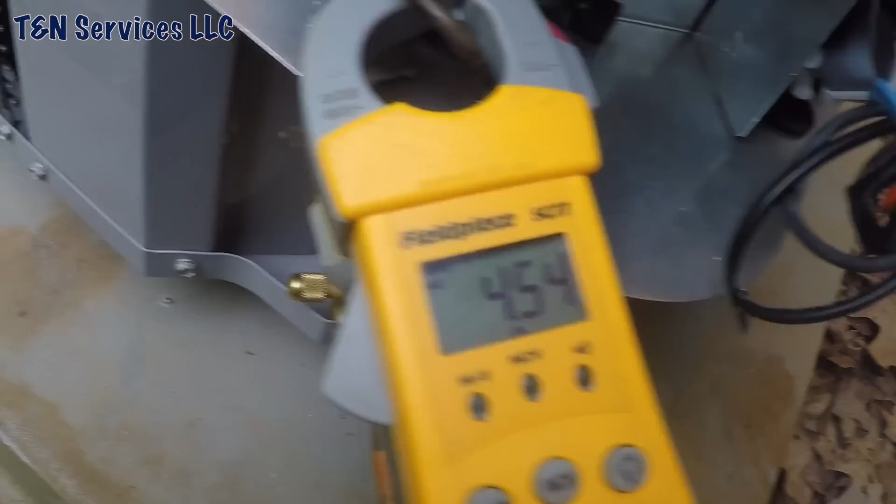On low speed. Oh, I turn my meter back on. So I just turned my other thermostat on, so let's see how long it takes to ramp up. While we're waiting for it to ramp up, let me show you the door. This dang door is pretty big too. Alright.

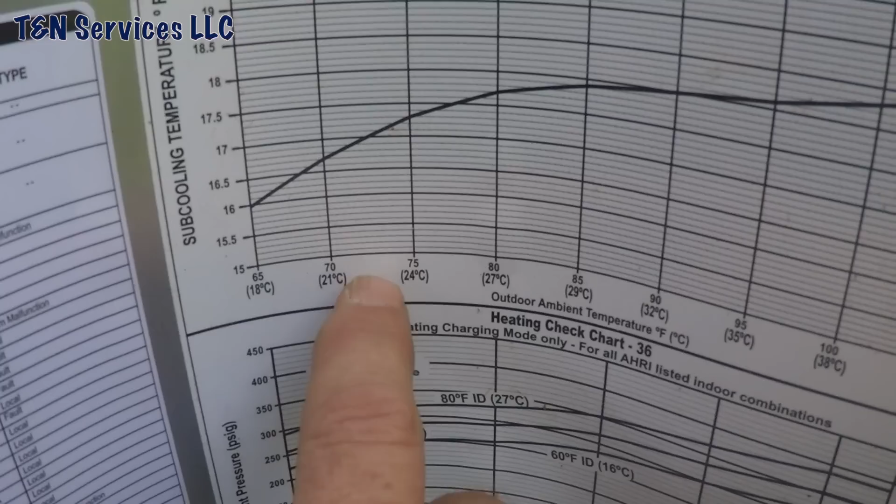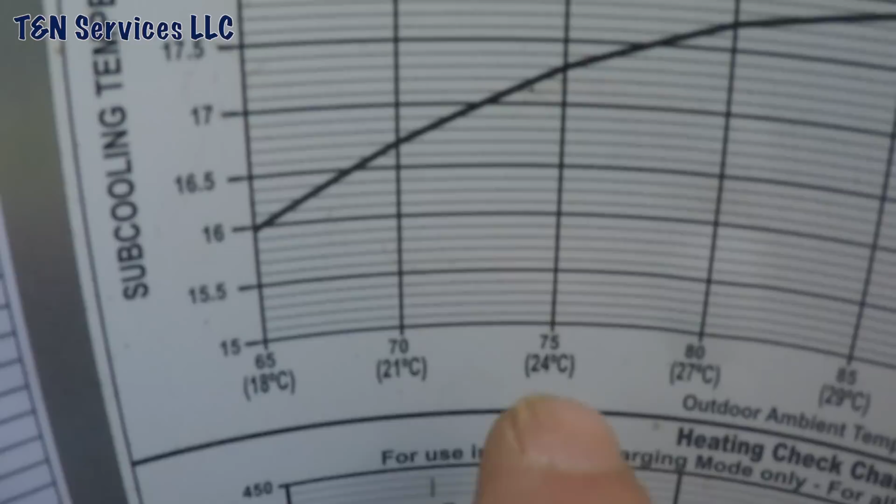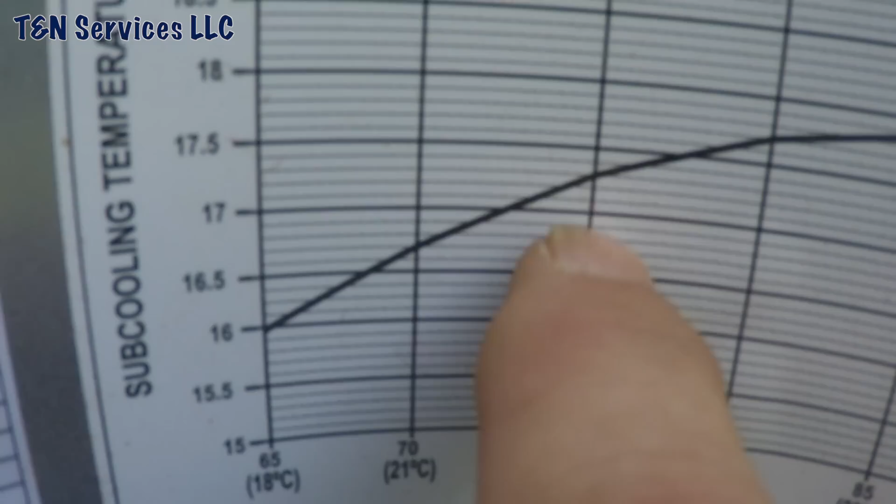Here's our old chart. I don't know if you can see it very well, but I'm guessing it's about 75 degrees out here right now. So here's our 75 degrees right here, and you go up, and if you look across, you're right in between 17 and 17.5 degrees subcooling. But look over here at 105. Go up to that top line, go over, 18.5.

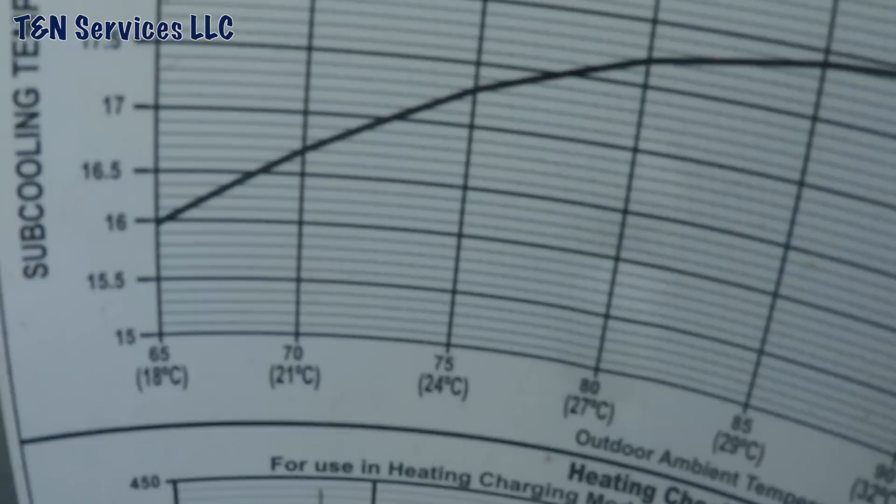There is no 10 degrees subcooling on this thing. The lowest you're going to do is at 65. You have 16 degrees subcool, and your line just goes up from there. So if you think 10 degrees subcool is fine on these things, it's not. And it's for all AHRI listed indoor combinations.

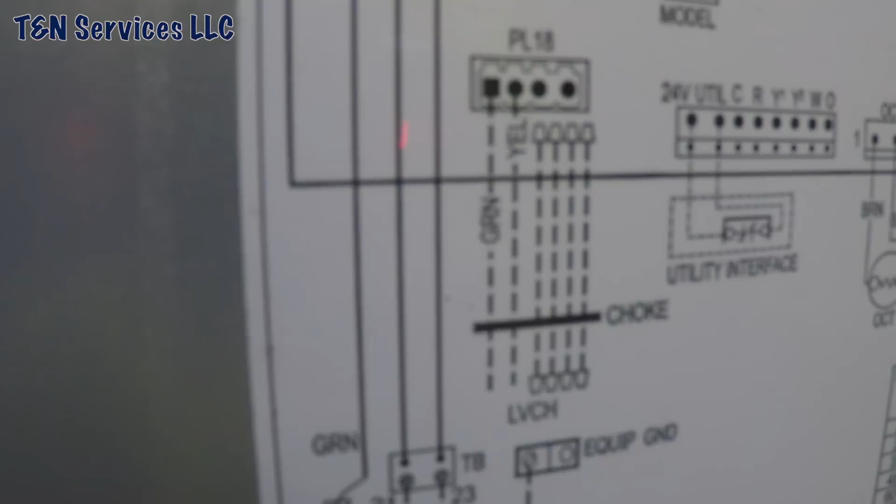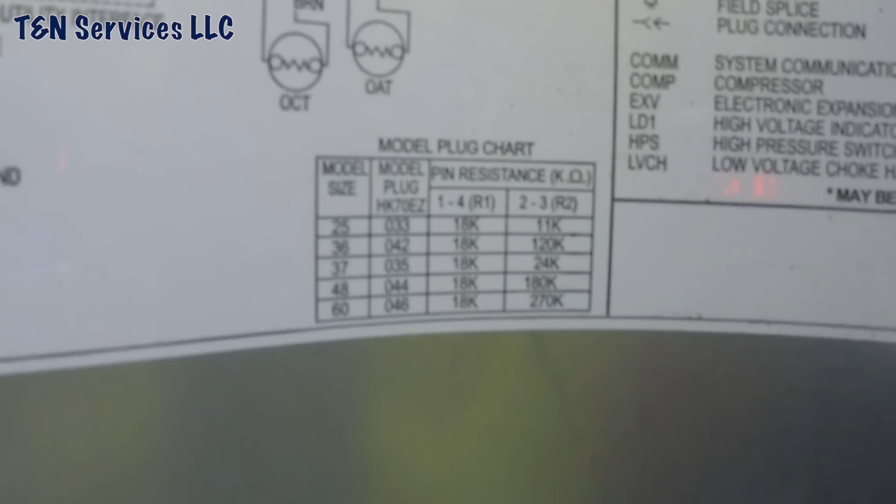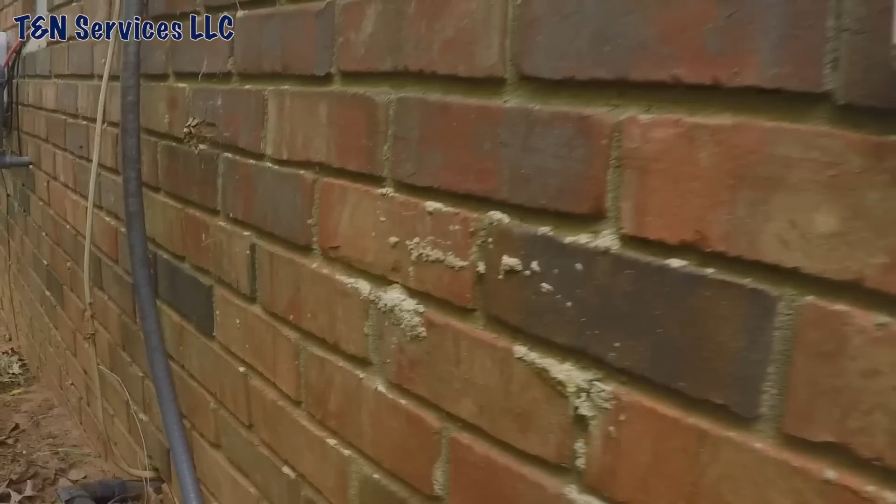Here's your little schematic, not much of one, so hardly any more wiring diagrams. Just kind of tells you about what we got here. Your model plugs. So if you have a 36 like I do right now, you got 18k ohms, 120k. 18k on 1 and 4, and 120 on 2 and 3. So let's see, those are the chokes. These little round things right there, up there. I was trying to think of the name the other day, and they are called chokes, in case you wanted to know.

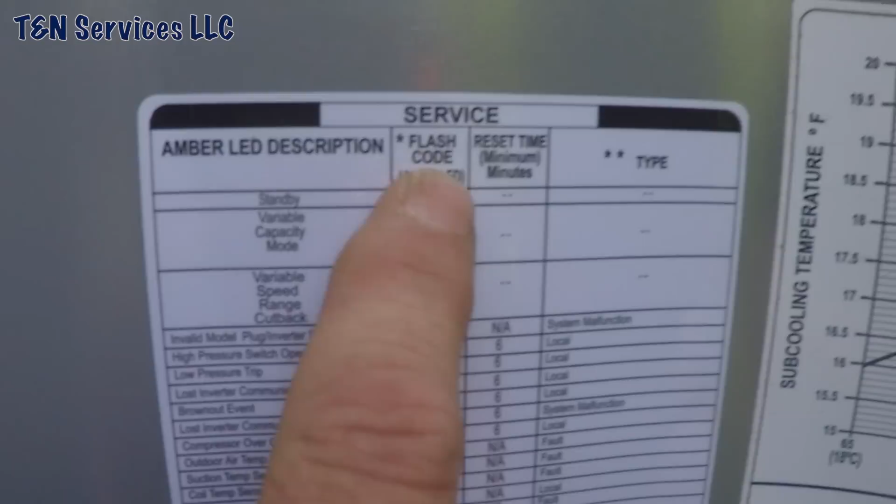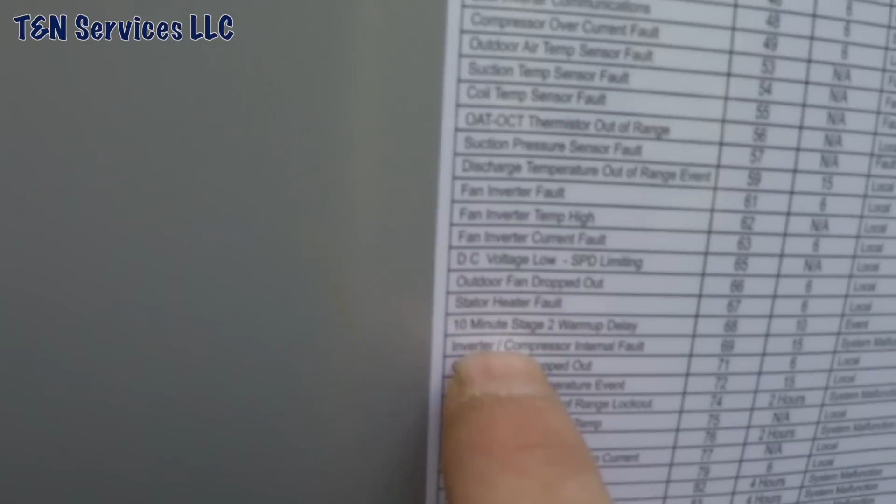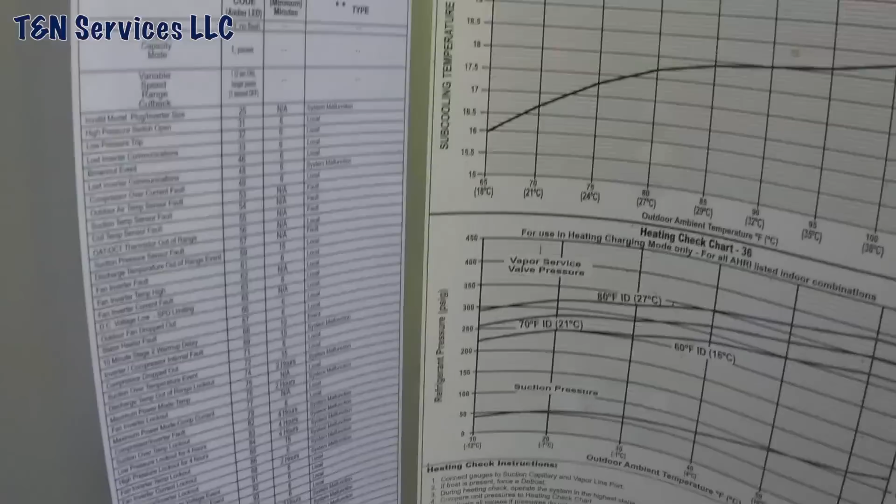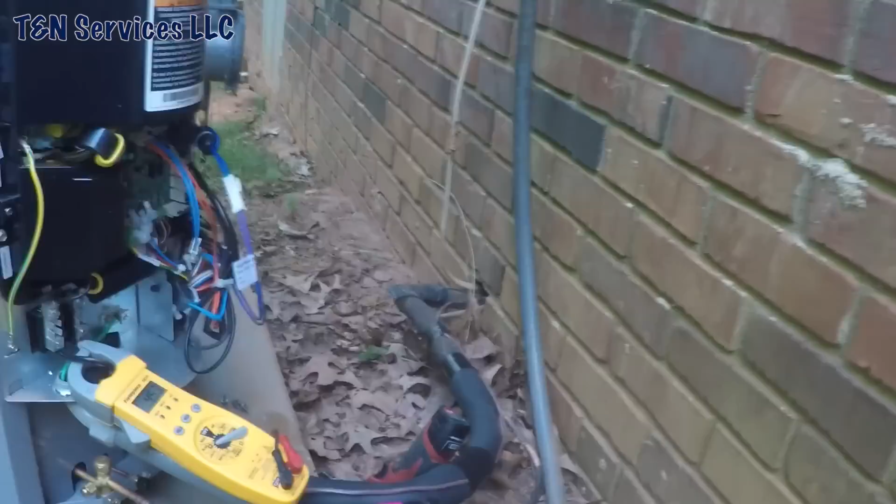Of course, here's all your LED lights, what it means. So last night mine was flashing 68, and let's find 68: 10-minute stage 2 warm-up delay. So there you go. It's a little different from the old units. A lot different, actually. So we're about 10 minutes into it. About 11 minutes, actually. I'm still on low stage. I'm still drawing 4.5 amps.

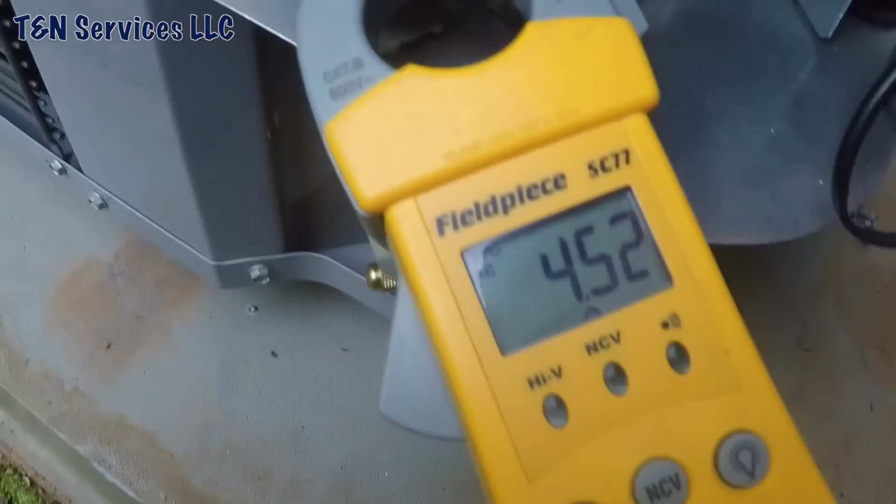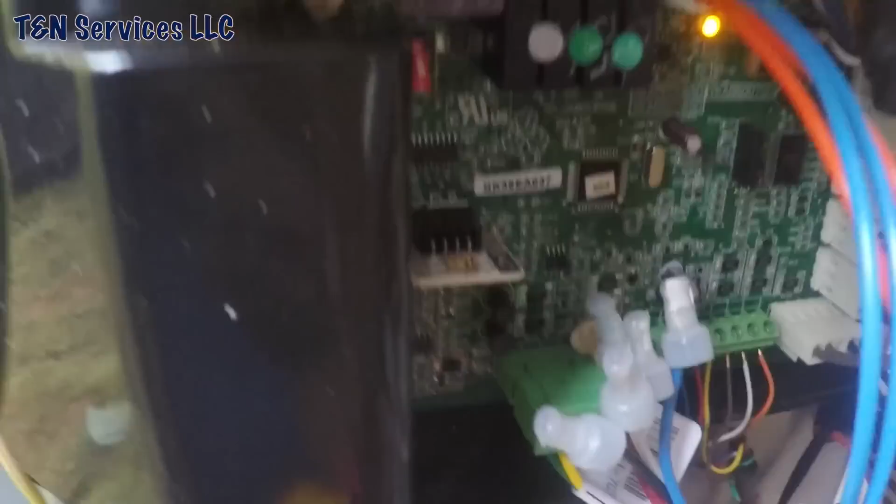There's a model plug right there. That tells this board what it needs to do. Everything's in that plug right there. You see those little silver pins on the top? They go from the tan part to the black part. So in between 1 and 3, that's 18 ohms, and between 2 and 4, that's 120. So I'm assuming you go from left to right.

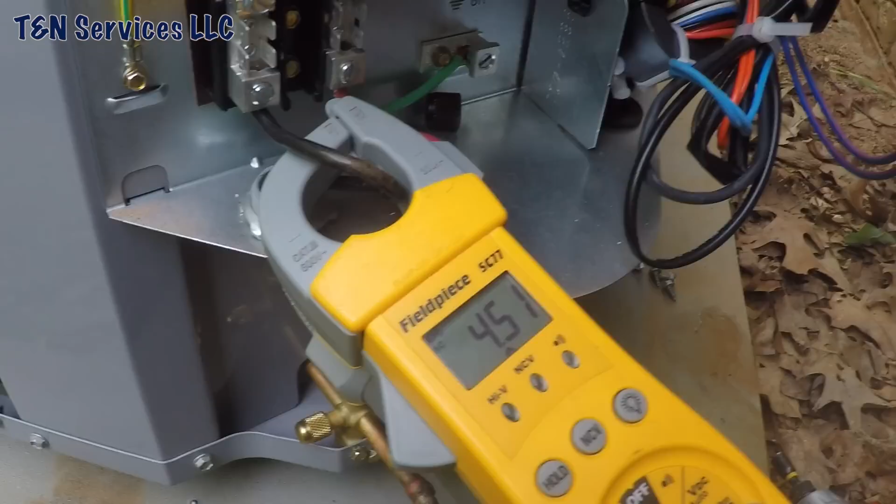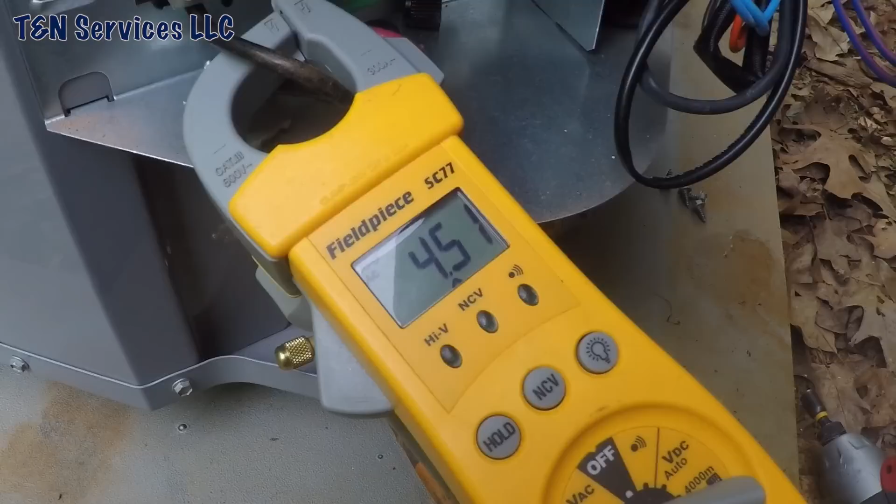There's little thermostat connections right there. That's for when you want to make it 2-stage. The little green connection right there, with the yellow and green wire on it, that's for doing fully inverter. We look at the bedroom stat and see what it's on. Make sure it didn't shut off on me. Now it's at 69 degrees, so it's not going off. So we should be ramping up here pretty soon. Like I said, we're just over 12 minutes into it. So when it ramps up, I'll turn it back on. Alright, so it took about 15 minutes, starting to ramp up now.

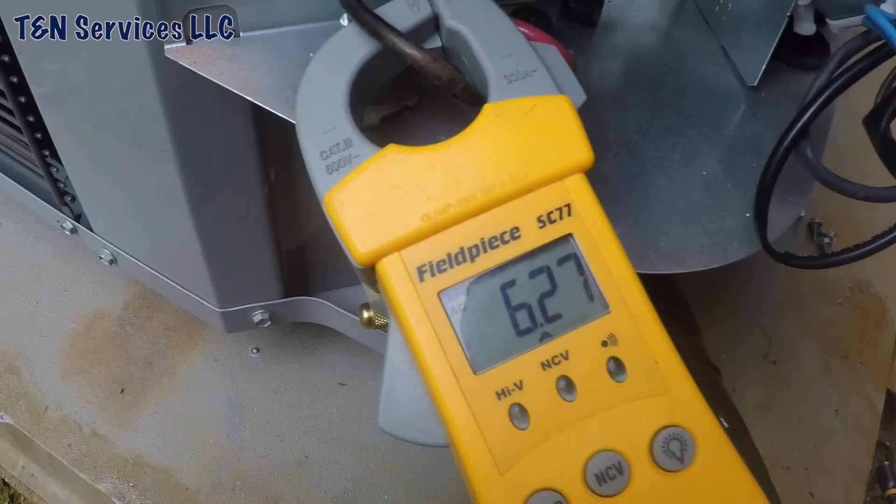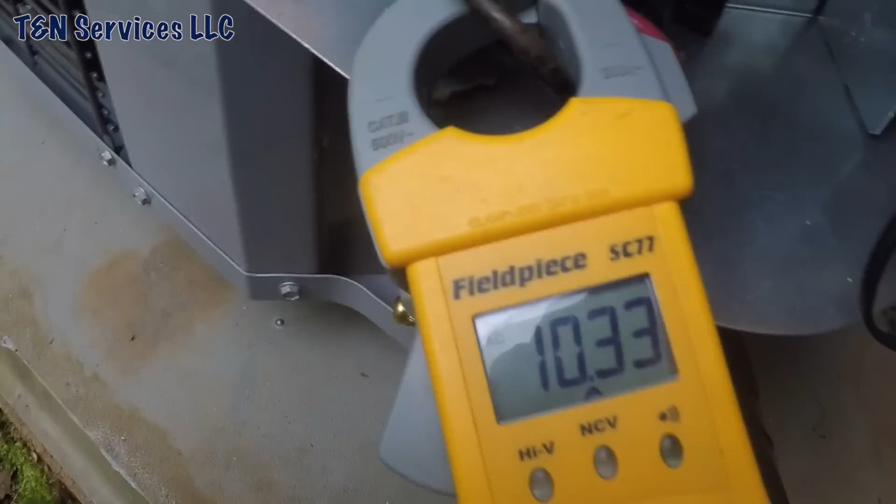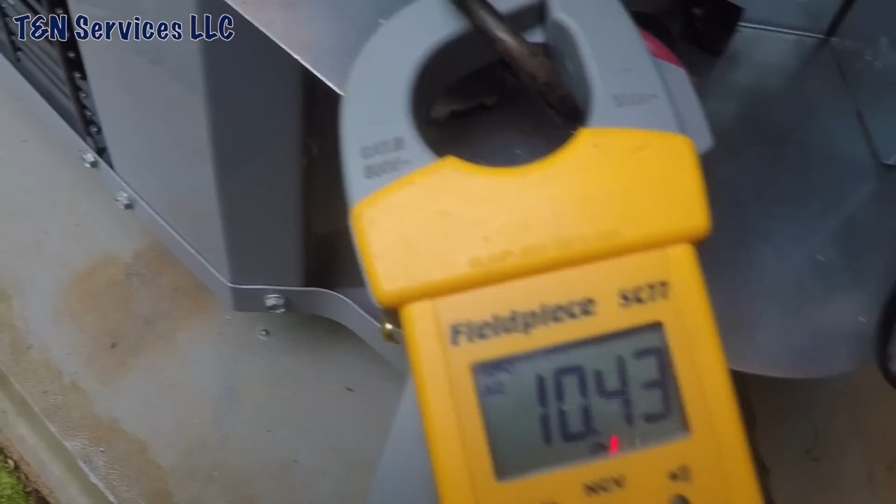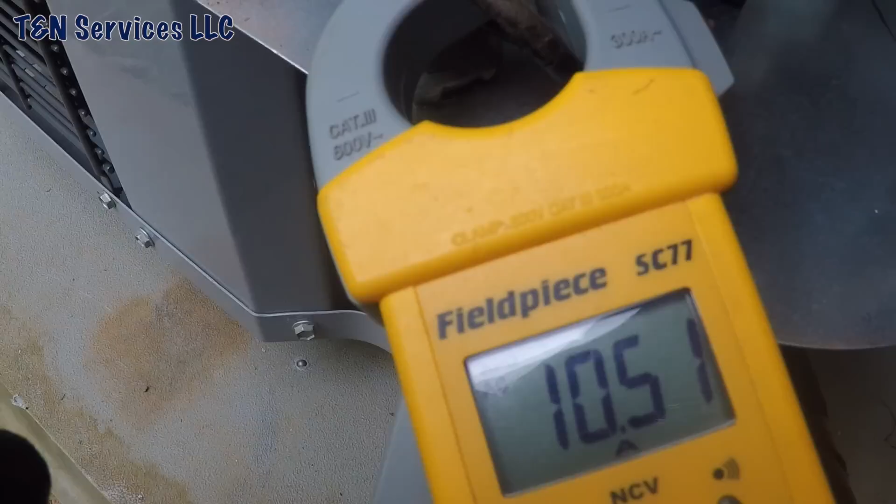It's getting ready to take off. Look at it. Get ready to shoot to the moon. Alright, so that's about as high as it's probably going to go. Remember on my old one, it was running like 10.7, 11 amps the whole time, from the time it started up till it shut off. So this one's going to help me out a little bit, but I'm really not going to get the full benefit of it until I change the inside and make everything communicate so it can work the way it's supposed to work.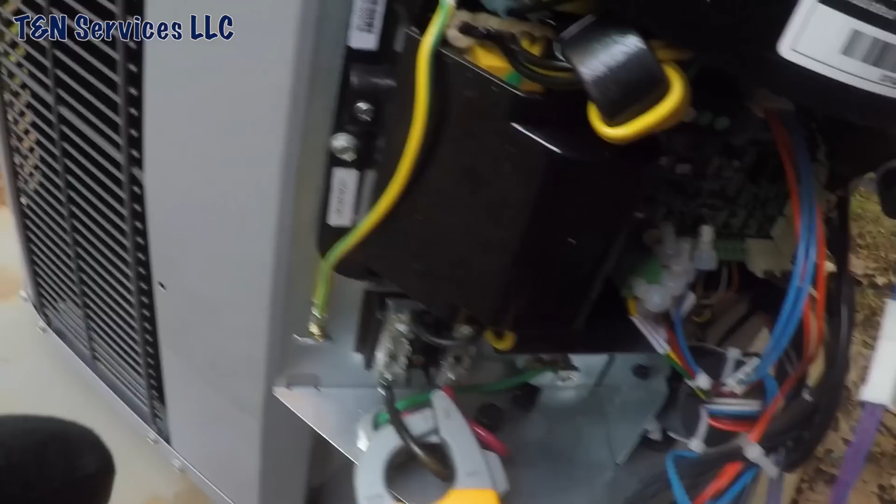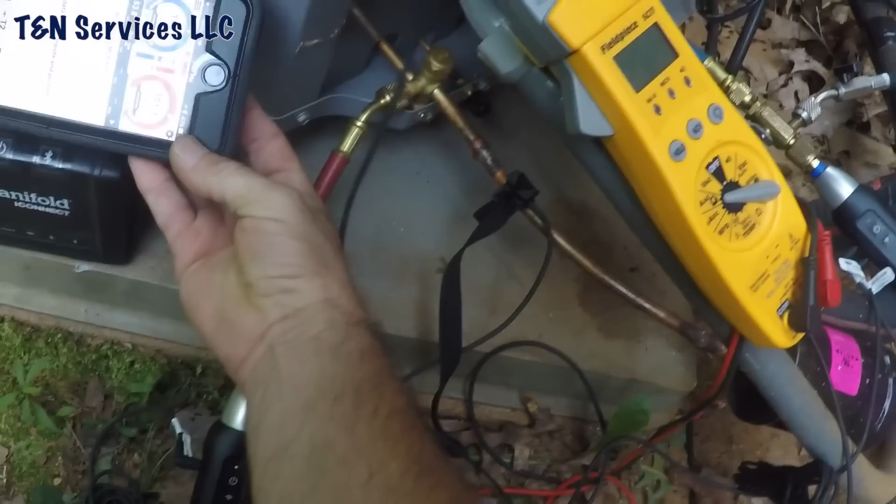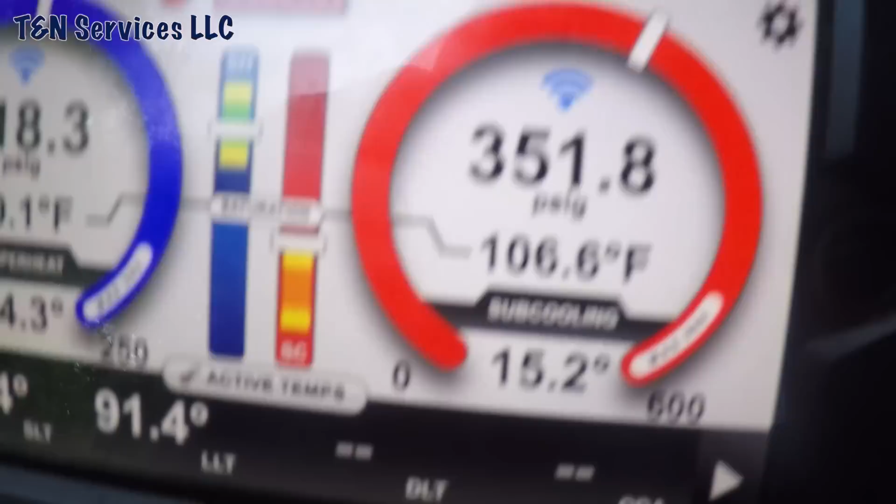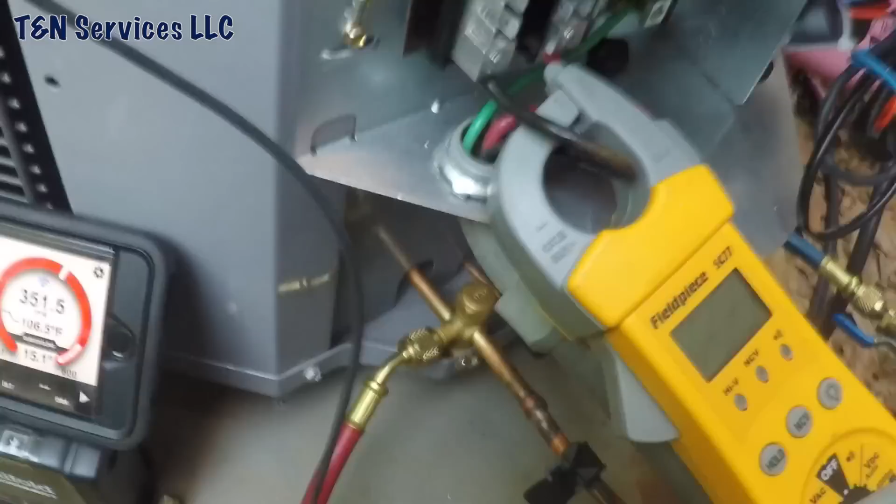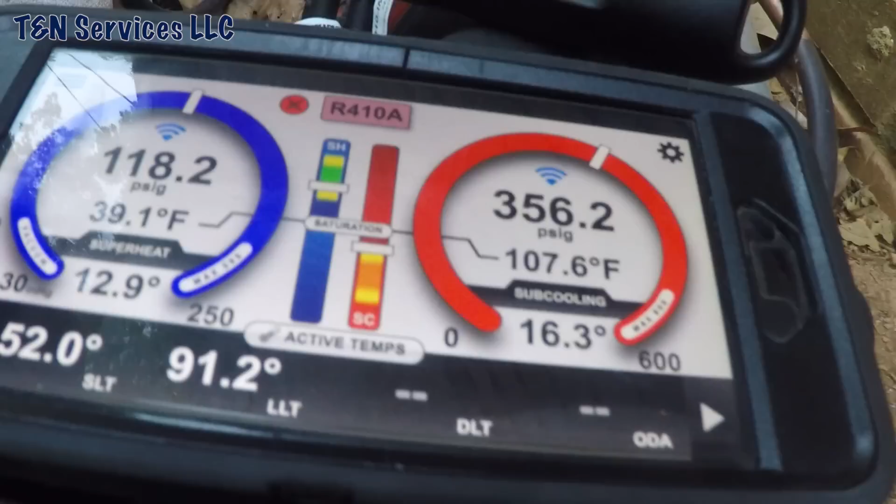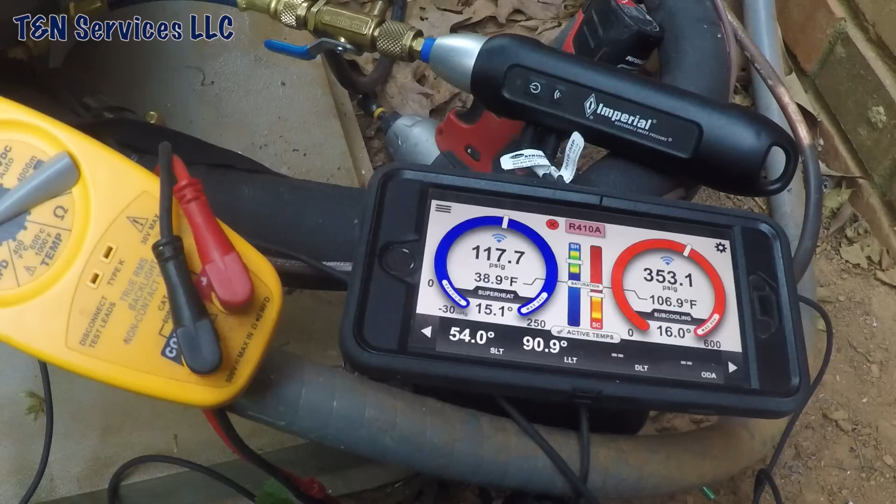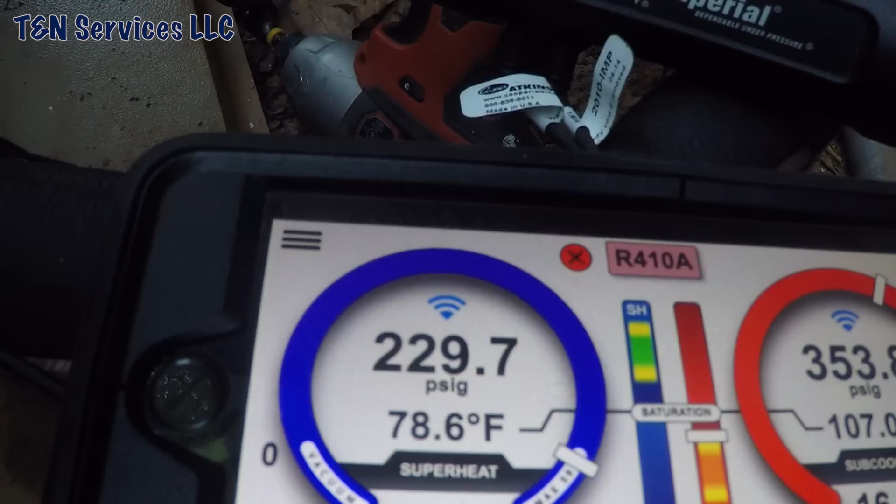So I'm going to go ahead and add just a little bit. See if that doesn't change things. That might be fine, just that little bit. I'm not going to get too crazy. I'm not going to fret over a degree. Remember, when you're adding 410, you got to take your time or you will overcharge it. Just a tad more, and that's probably going to do it. So it just ran back down. One of the zones shut down. So I'm gonna leave it as is and call it done.

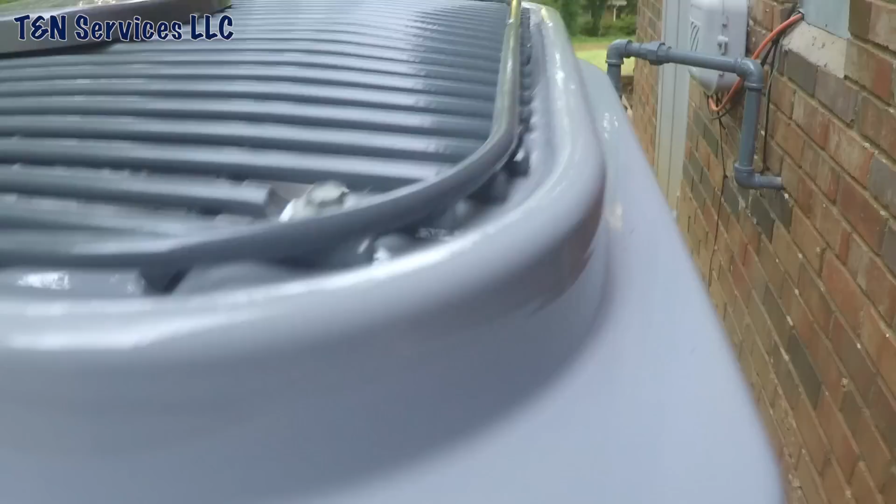And let me go ahead and turn power off so you can see how long that red light stays lit. Alright, see that red light staying lit? That means that capacitor is still at like 450 volts DC. So this thing right here will kill you if you mess around and get into those circuit boards there. See, it's going dim. So anyway, that's it with the inverter.

I'm glad I bought it, but I do think that it's not going to take me very much longer to do the fully communicating 5-speed, because I think I'm going to get tired of the 2-speed really fast.